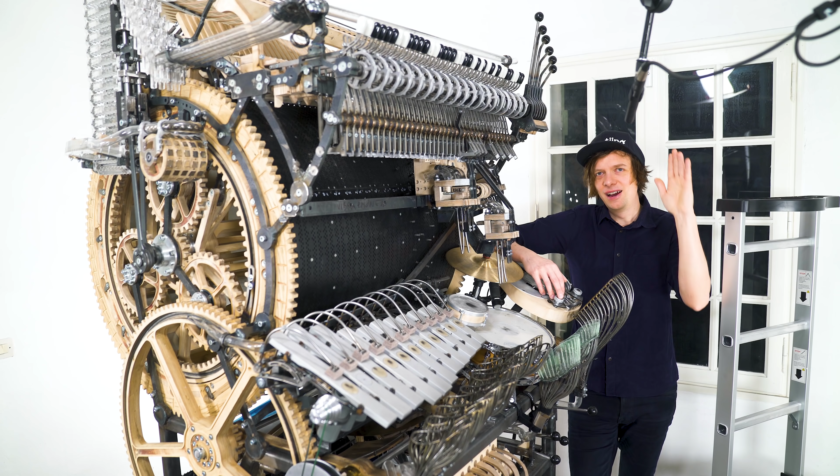Hi everyone, in the last video I fixed the marble pressure of the kick drum. It's perfect now. I'm working towards a big marble test with maybe 100,000 marbles using the kick drum, snare drum and the hi-hat, and for that I also need to fix the pressure of the snare drum and the hi-hat.

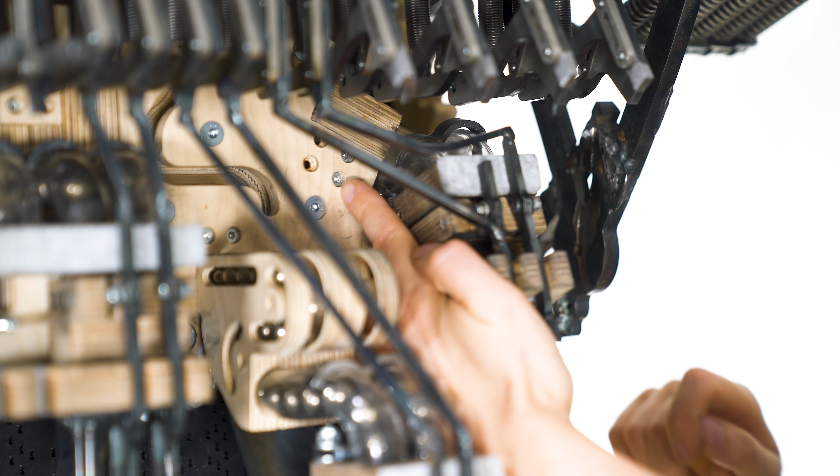This means changing out these plywood parts for the snare drum and some plywood parts up here for the hi-hat. I made this system modular so I can make new parts and exchange only these. Even though it's quite a lot of disassembly and assembly, it's a one-time setup.

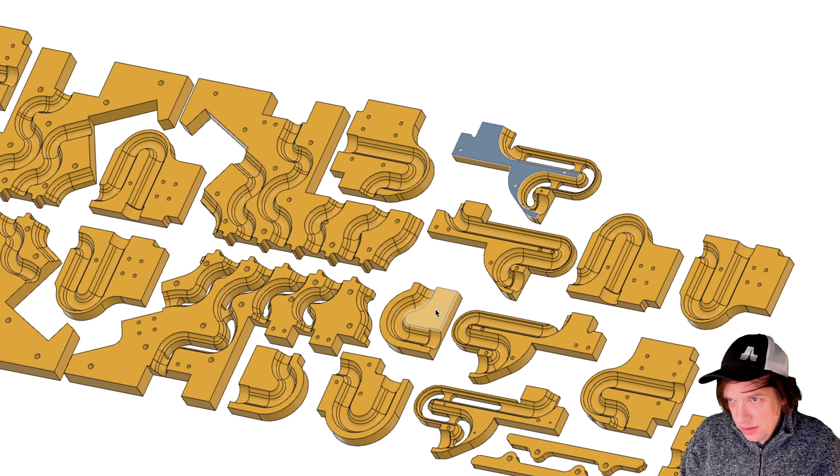So the first thing I have to do is to CAD the new parts. These are all the parts for the machining layer of the drum pressures. I'm going to extract the snare drum and the hi-hat drum part from this design.

So here's for the snare drum, and I want to make this marble path shorter. But in this design, I have deleted the design history, which means I don't have any sketches where I can just change this design easily.

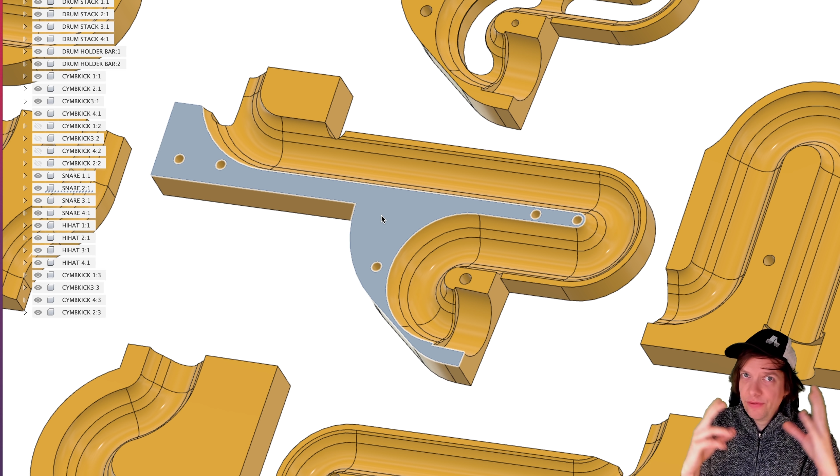So when you have a body in Fusion 360 with no design history, it's actually very, very easy to recreate the design history. This is very useful when you get a step file from someone else with no design history. I'm going to really quickly show how I create design history for a part like that, so we can then change it and mold it the way we want to.

So these are the 8 plywood parts I'm going to recreate, and I'm going on and on about the thing to learn the dependencies in the timeline. The reason I'm going over this is when I learned CAD, this is something that I couldn't wrap my head around, and it cost so much question marks.

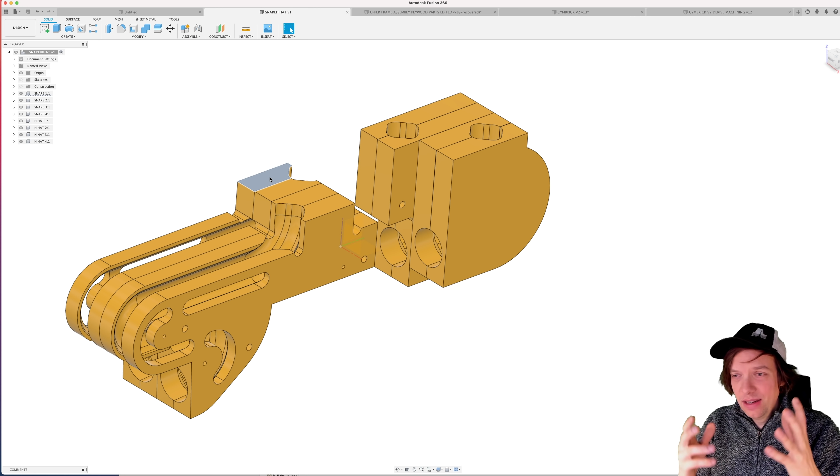I was just bashing my head, working for hours, not understanding why I couldn't do this or that, wasting a lot of time. I don't know how useful this is for you, but if someone would have shown me this in the beginning of the Machine X process, the world tour would be going on right now.

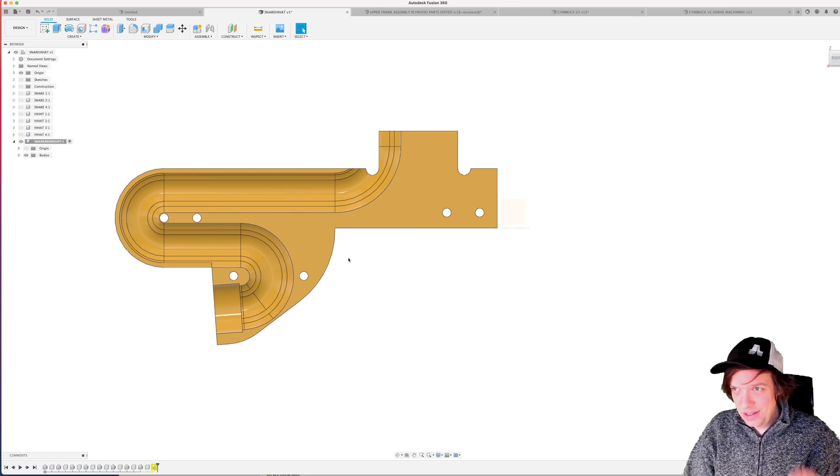So the first thing I want to do is to transfer the contour, the side look of this piece into a sketch. And already here, it's a perfect example. We have to think about what we're doing, because the sketch in Fusion 360 needs to lie on a plane.

When we choose our plane, we have to be very careful. So it's very easy in this situation to just think, I want it on the side of this body. So I create a sketch and I choose the side of this body and I'll work from there, right?

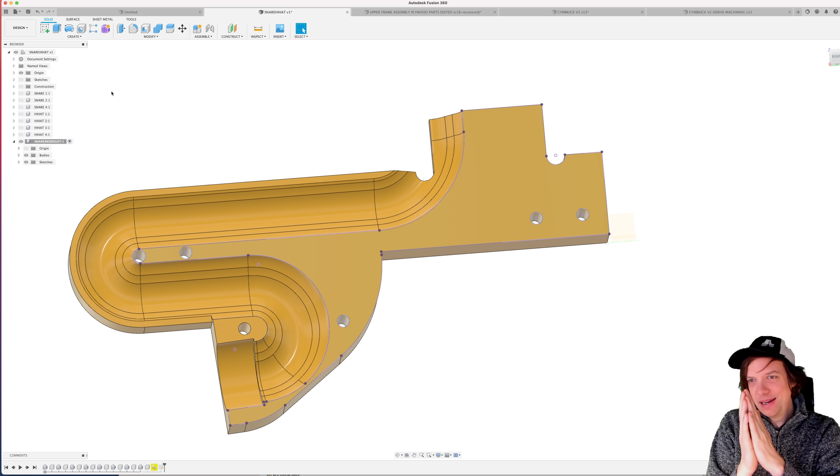Wrong. When we put the sketch on a plane, we want to put it on a plane that we want to keep forever. We don't want this plane to be on this body because we want to be independent from this body. So instead, I'm creating an offset plane, but I'm basing the origin of this offset plane from our origin. We have our little plane.

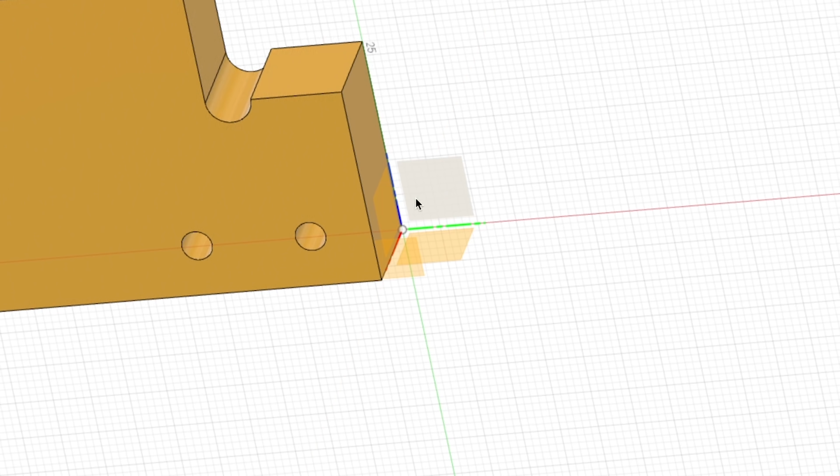I'm going to create a sketch. And now the program asks me, on which plane do you want to create your sketch? So you can see kind of how it chooses these different axes here. When I go around, I can create it on the top of the piece there, top of the piece there, side of the piece there.

We want to create it on my newly created construction plane, this little square here. The beauty of this is that our sketch is now independent from this previous body that we want to delete in the end of this process.

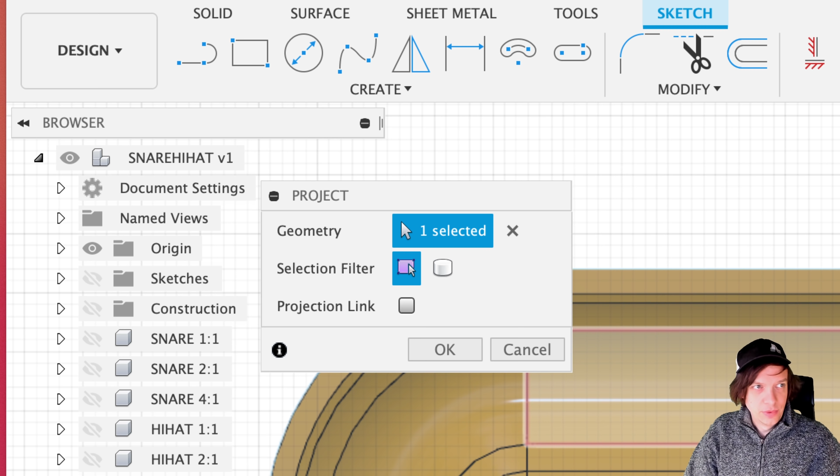So I'm projecting all the lines, but I'm unselecting the projection link. So it's independent. And now I'm just choosing all the information I want. So here's our projected sketch, independent from this body. There's no link between this sketch and this body.

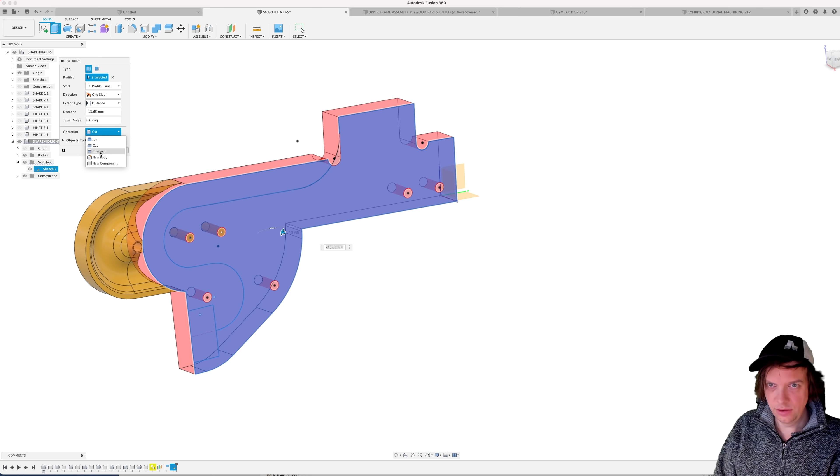Move point to point, this part of the marble path to that point of the marble path. Now I'm going to extrude this minus 13.65 millimeters. That's not a cut. We want to create a new body. Old length, new length.

So now I need to make the profile of the marble path on this plane up here. This is the cutting sweep that cuts the marble path. Only one thing left to do is extruding this wall so we can see the marbles from the outside.

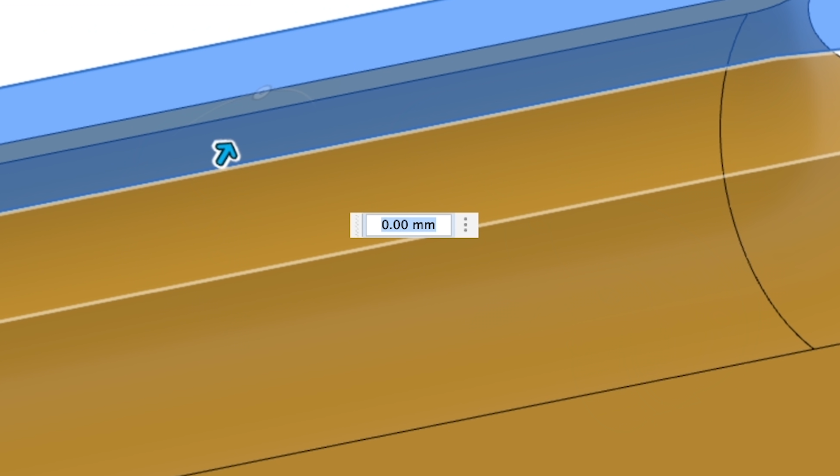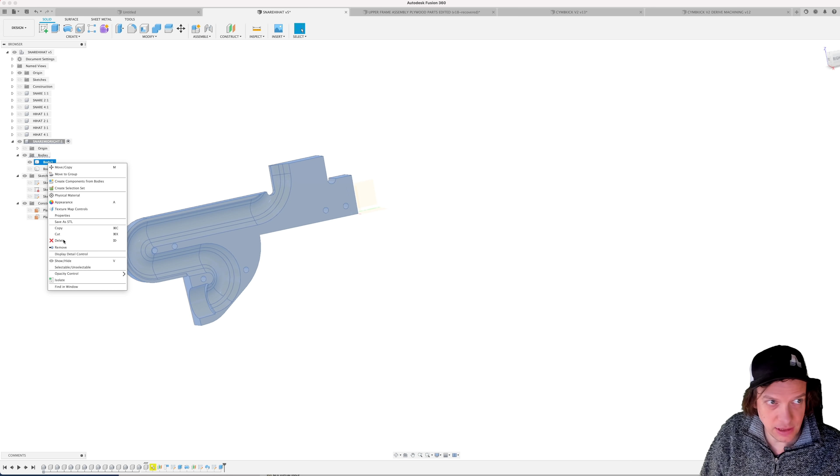And here comes the huge point. The original body, I can just delete it. Nothing happens, nothing breaks in the timeline because nothing of the geometry in this body is linked to the previous body. We are free. I'm done with all the parts.

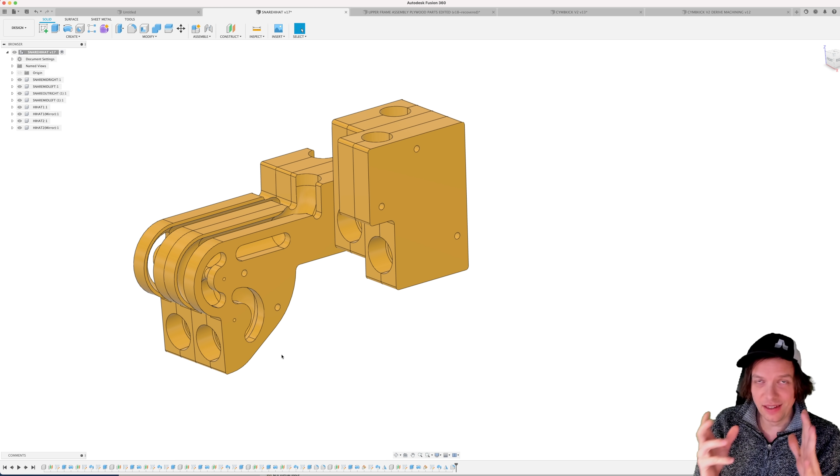So this one was the old one and behind you can see the new one. Much faster. We have all our new parts. We have a design history. This is now a parametric design and we have no links to the old parts. We've reverse engineered these parts and it doesn't take a lot of time and everything is clean, and we are free to move on to the CNC machine.

One quick game before the CNC machine. I'll show it to you regardless how well I do or not.

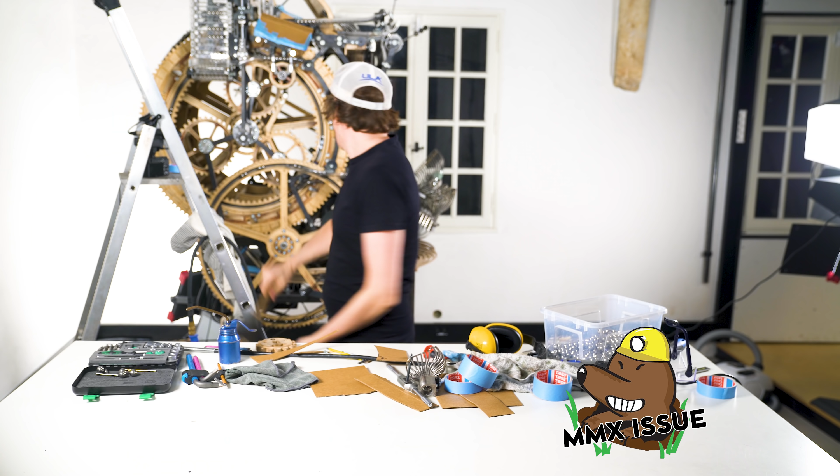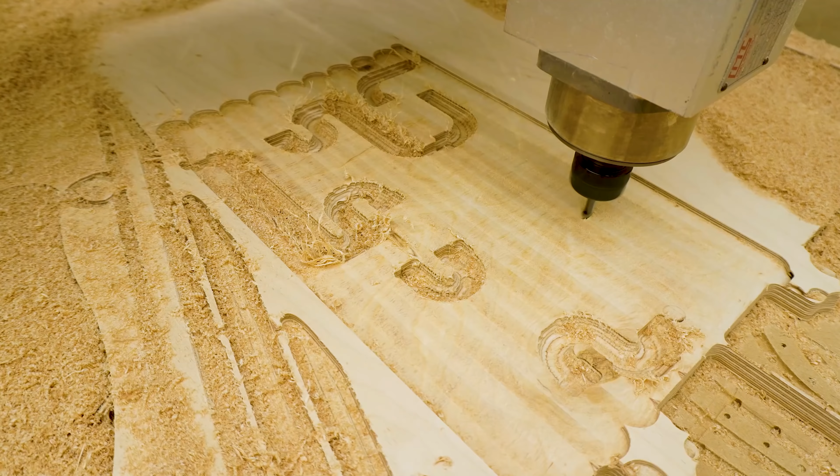Mole infestation is spreading to all parts of my life, worrying times indeed. Anyway, you could see me there starting flattening the stock of the plywood. I have to make these parts 13.65mm thick, and that's been kind of difficult before. My CNC table is not really accurate, so I have to recut that soon and do some maintenance on my CNC machine.

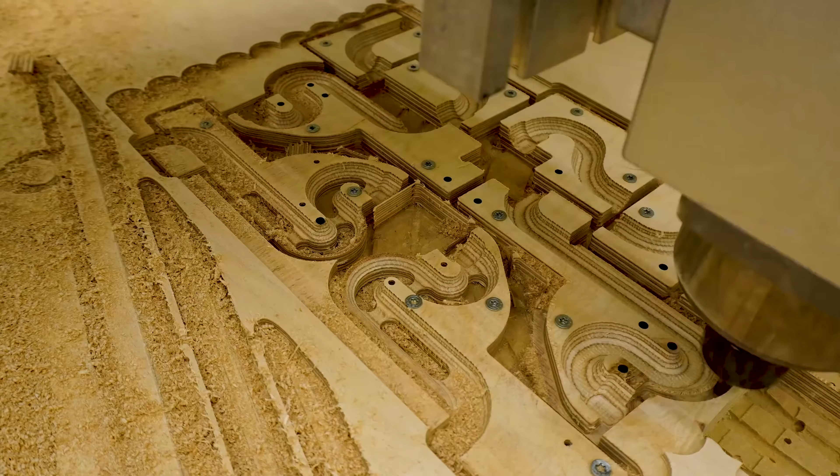So here the machine is waiting for me to change the tool and restart it. Change to 2 sizes of drills, and then I put screws through all the parts so I don't have to use tabs. I'm happy that I use a 2mm fillet on all corners of this part, even if it's a 90-degree outside corner. I put a little round over, you can see it here actually, on all the corners, which makes the burr go away.

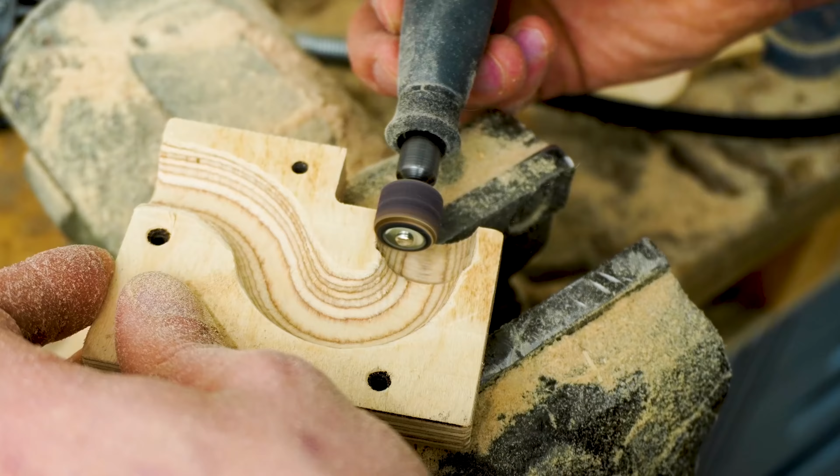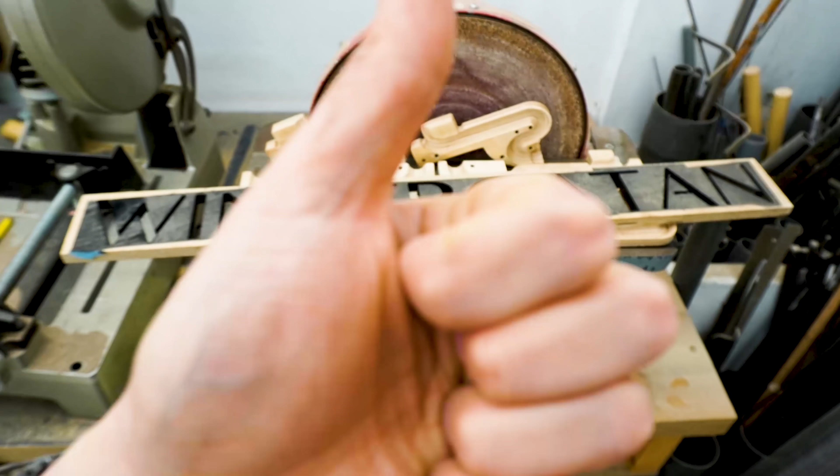It's quite a lot of post-processing still. My cutting bits are quite worn out, so they don't cut crisp, but the parts are done. Great, we have our parts CNC machined. Let's take a closer look.

So let's check the thickness. I've been struggling with the thickness because my CNC table needs to be recut and adjusted, so it's not so precise. But that is 13.66. Since this design is designed to be stacked in layers like this, any error in thickness multiplies. Oh, here's 54.5, so we're less than 1mm off with 4 layers, which is actually really good.

This will definitely travel much simpler in these versions. So as always, I use my favorite technique of splitting the design in the middle, so it's easy to CNC from one side like this, only one-sided machining. And when I put the 2 parts together, we have a 3D internal marble path. Et voilà.

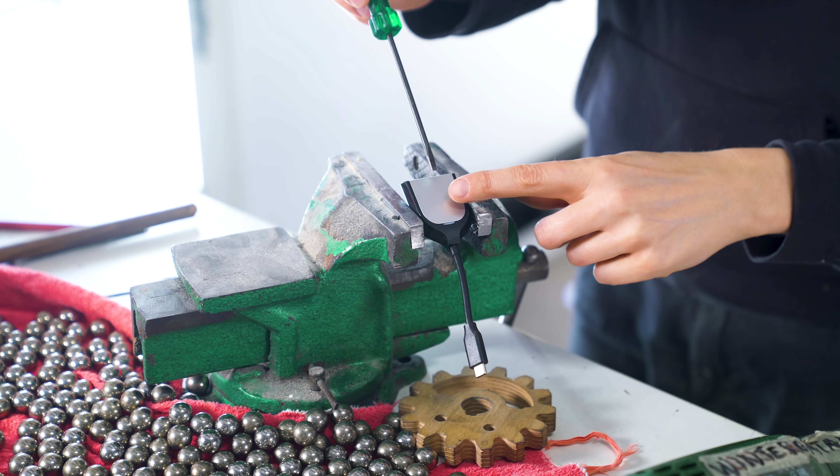Ah, there's a screw. I feel like Louis Rossmann now. He's been on a crusade for the right to repair. I'm so with him on that.

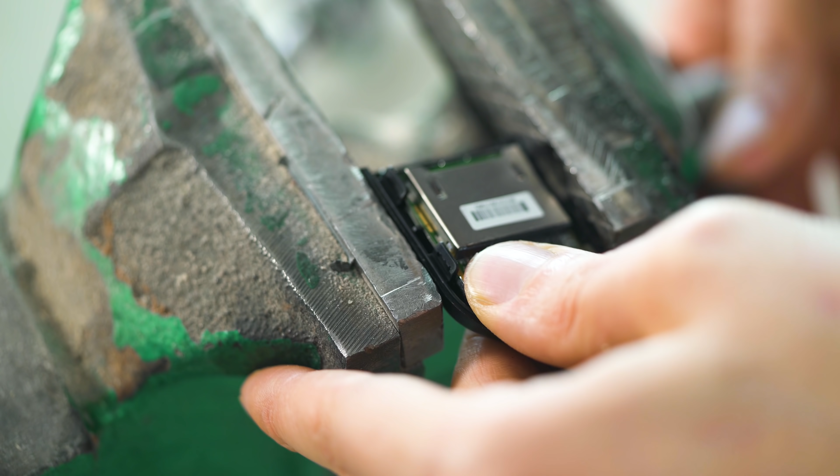I need to get under this lid. Wow, this requires delicacy, not my strong point. If I cut those off though. Here goes nothing.

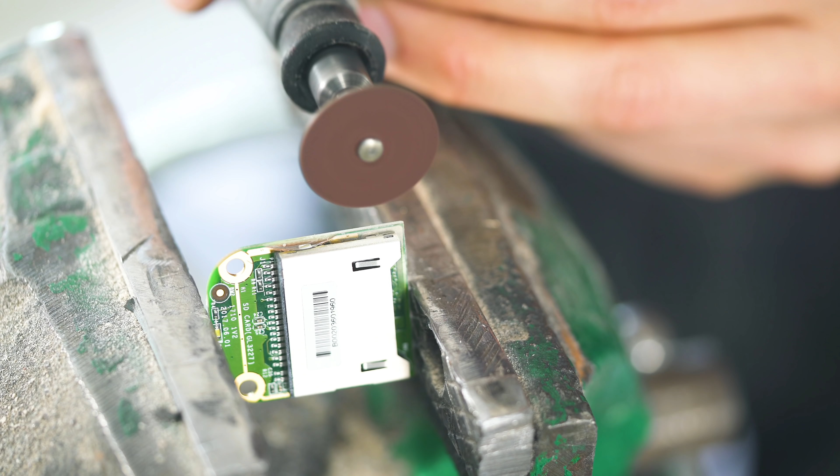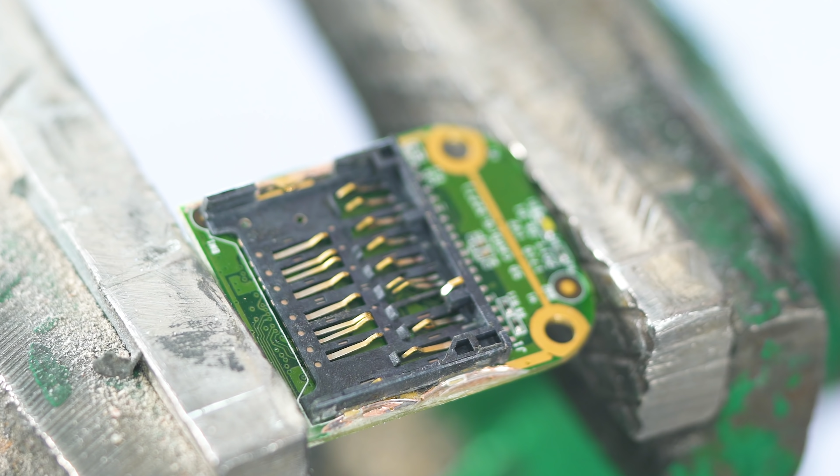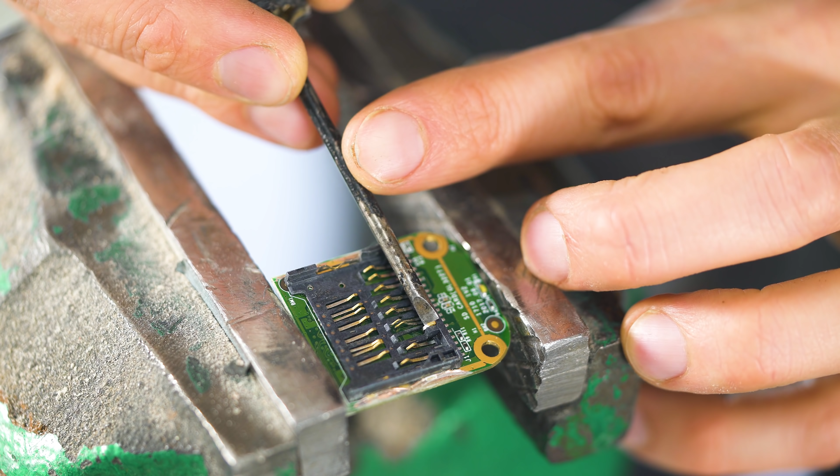They're all transferred through here to your eyes and ears, everyone. I had a broken SD card, leaving a piece of plastic in here. That little piece of plastic bent this little thing. Imagine being on Mars - your whole life support system depends on that little electronic connection.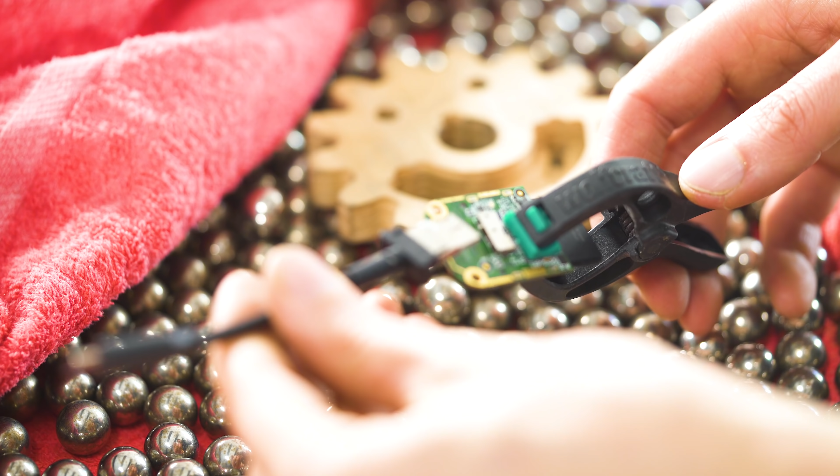Okay, like that, and then... Yes. What do you think, Wilson? He can't believe his eyes. And now, the cable back in, and now final test. King of the universe!

Let's see if we can read from it. Oh yeah, oh yeah, oh yeah.

Yo, yo, yo, yo, yo. That's how I always start the videos for Hannes. God morgon, god morgon.

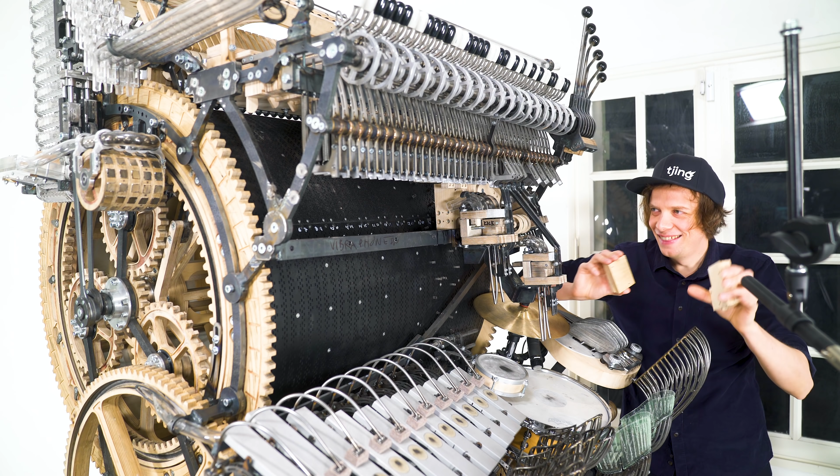Whacked the chess mole, whacked the SD card mole. They are not safe from the mole slayer. Next step now is to take these parts and disassemble all of these parts to get these new parts in.

Unfortunately, there has been a lot of things happening behind the scenes that I had to take care of, so I will have to do this assembly in the next episode. However, I wanted to share what I did yesterday, because it was another Thursday and I went on another bike ride. I'm just sharing because this makes me really, really happy, these Thursday bike rides with an awesome bike group.

These guys are too fast for me. I was like dead the whole evening yesterday. But I know long term, doing these exercise bike tours is amazing for this project. So let me bring you along with me on a Mediterranean mimosa adventure.

Another Thursday, another bike ride, and I wanted to show you something special in the background here. So here's the bike, and if we look down there, you can see the sea and the beaches, and over there is the Alps with snow. How cool is that? And behind me, Mount Doom.

And here's our friend from last week. Uh-oh. Oh no, I can't believe it. Everywhere I turn. If we go this direction, we have 479 kilometers to Venice - around 30 minutes bike ride at my speed. Italian Alps, Cannes, then the sea and the mimosa.

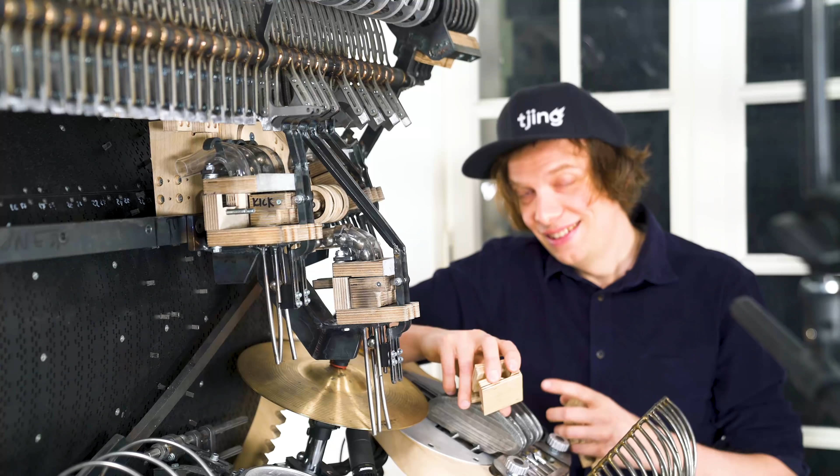Even the sun has a shade of yellow - in solidarity, it's just joined my campaign. That car is with us too, the original Mimosa Village. Next time someone claims to serve you a mimosa salad, you should challenge that claim.

So motivationally, it's a little bit of a struggle to disassemble all this and reassemble it to change these parts. If I can do it early in the morning, it's gonna be all fine when I'm fresh. And the success with the kick drum pressure - that was plug and play. Perfect result on the first try.

This is the third try for the other channel, so this should get us closer and closer to the big marble test, whenever the machine is ready for that.

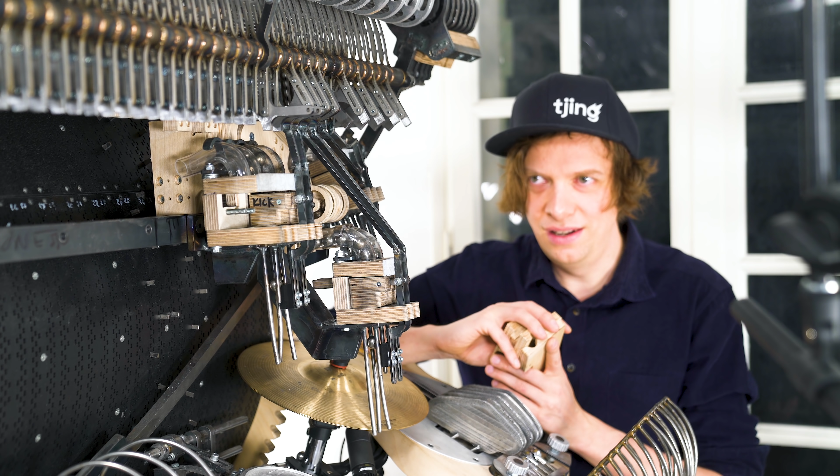This machine is such a large world. It has like 10,000 parts and each sub-assembly is a little project in itself. I'm learning the skills required to make this machine work. So it's a very slow, long grind, and it's an honor to have you with me in this journey.